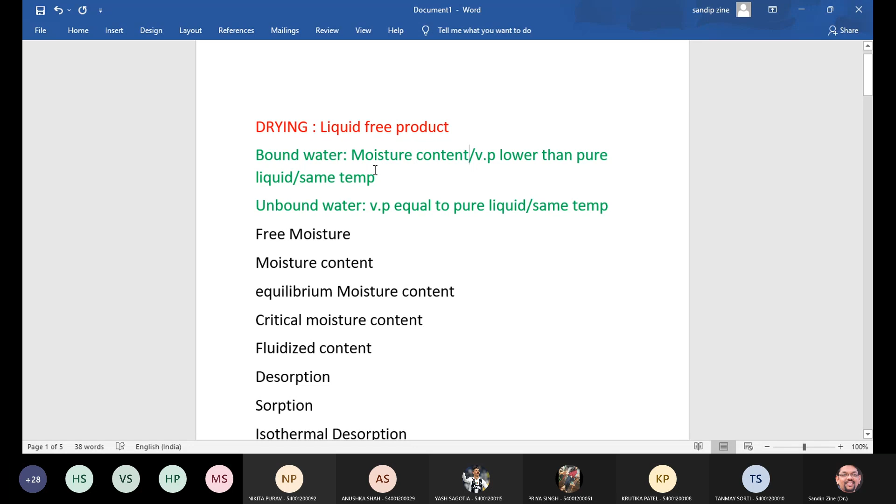Clear now, the definitions of bound water and unbound water? Any doubt over here? Because these terminologies we are using to understand the various equipments that we are using for drying purpose.

Whereas free moisture, what is the meaning of free moisture? It is the moisture content of the solid in excess of the equilibrium moisture content. That is called free moisture. Clear this particular thing? Free moisture is the moisture content of the solid in excess of the equilibrium moisture content. That is called free moisture.

Then obviously the question will pop up in your mind, then what is moisture content? So moisture content is measured by the ratio of weight of dry sample to the ratio of weight of water in a sample. So this is nothing but a ratio, isn't it?

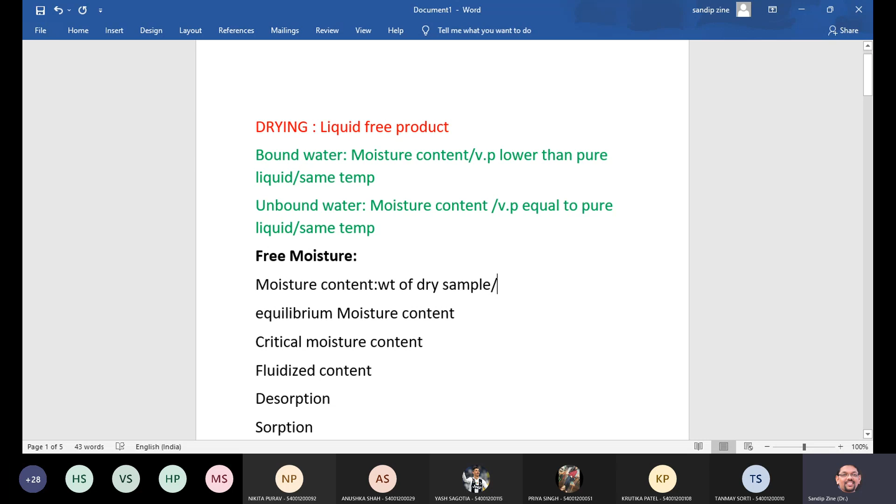I'm just mentioning over here the definition of moisture content, that is the ratio of weight of dry sample to the ratio of weight of water in a sample. So that is called moisture content. Clear this definition as well.

Any doubt over here, you can raise your hand, or maybe you can share your thoughts on various terminologies whatever we are going to use. One important definition is there, students, equilibrium moisture content. What is an EMC?

Equilibrium moisture content, it is the moisture content of the solid when in equilibrium with the given partial pressure of a vapor in the gas phase, and that is called equilibrium moisture content. Clear this, because this definition is also important over here.

So what we are mentioning over here, it is the moisture content of what? Solid only. And what is the difference? When in equilibrium with the given partial vapor pressure in the gas phase. I'm just writing keywords over here.

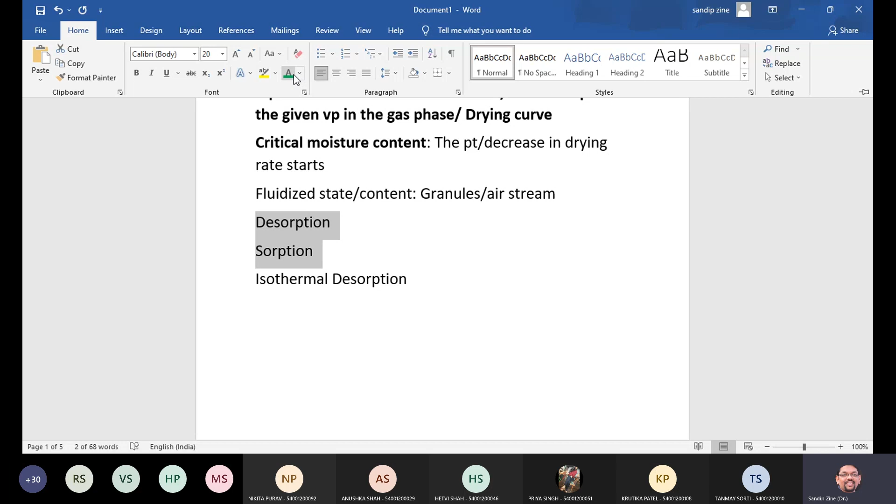Would anyone like to add what is the meaning of desorption and sorption? Any student would like to share their thoughts on these two terminologies? Akshat, Anish, or Devanshi, you can drop your points here. Jenny, can you mention something about desorption and sorption?

Sir, sorption is basically absorption or adsorption. Okay, agree. Any other sharing?

And sir, desorption would be the opposite, right? Release of the substance that was sorbed. Correct, correct, correct. Whatever Anish reflected on these two terminologies, we will pick up the same point by considering your understanding related to equilibrium moisture content.

This terminology, equilibrium moisture content, is the moisture content in a solid when in equilibrium with the given vapor pressure in the gas phase, useful to understand the drying curve pattern. By considering this understanding, we will try to understand desorption. Desorption occurs if the solid contains more moisture than EMC.

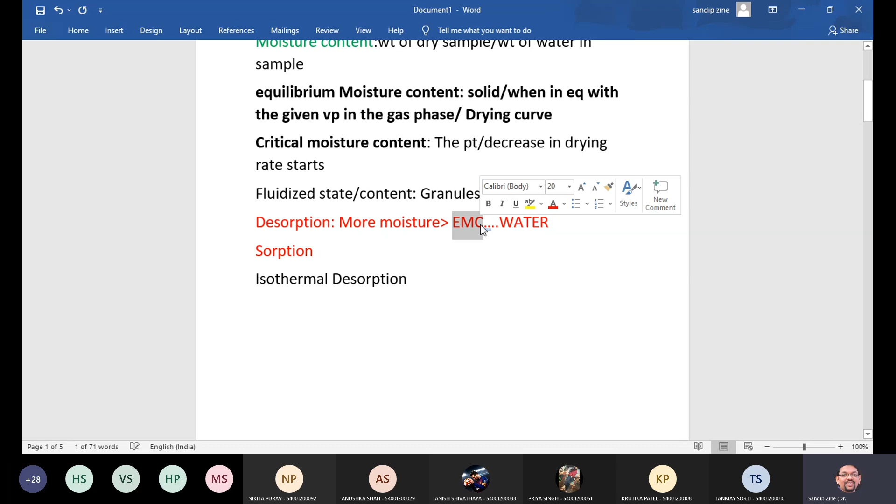More moisture content than EMC - I will use the greater than symbol. More moisture than the equilibrium moisture content, then the solid will continuously lose water. What will happen then? Obviously water composition is higher, so in desorption, water will be released continuously until the equilibrium moisture content point is achieved. Till that time water gets released, and that is called desorption.

Is this terminology clear? Sir, sorry to interrupt, but I'm facing some network issue.

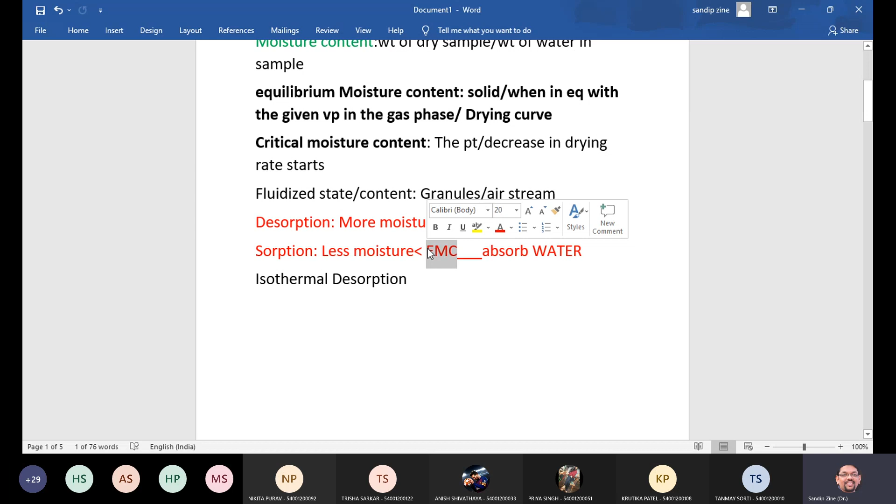Clear this thing, students, desorption and sorption. I am giving you more stress over here. I am taking these terminologies very slowly because we use the same kind of terminologies number of times when talking about principal construction and working of various equipments in this drying chapter.

One more last terminology we will pick up, that is isothermal desorption. Now isothermal, only one word we have added just before desorption. It is the process of reducing the residual moisture content to optimum values when drying is continued at warm temperature. So drying is at warm temperature.

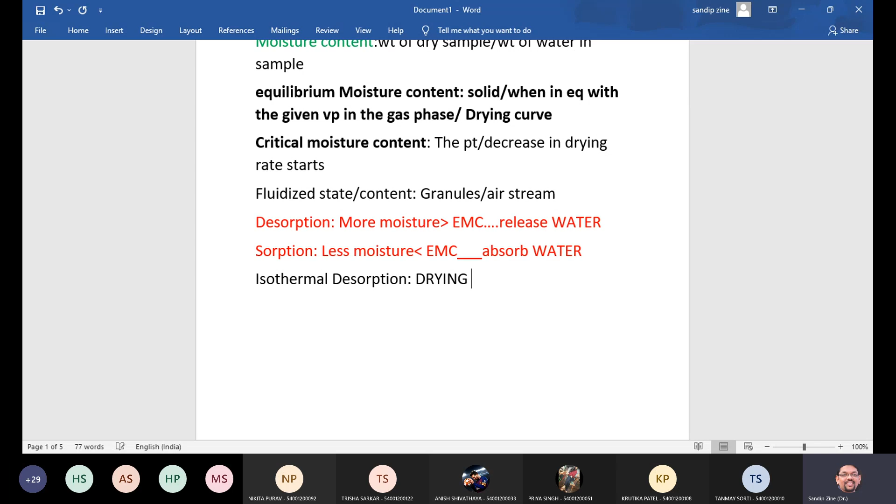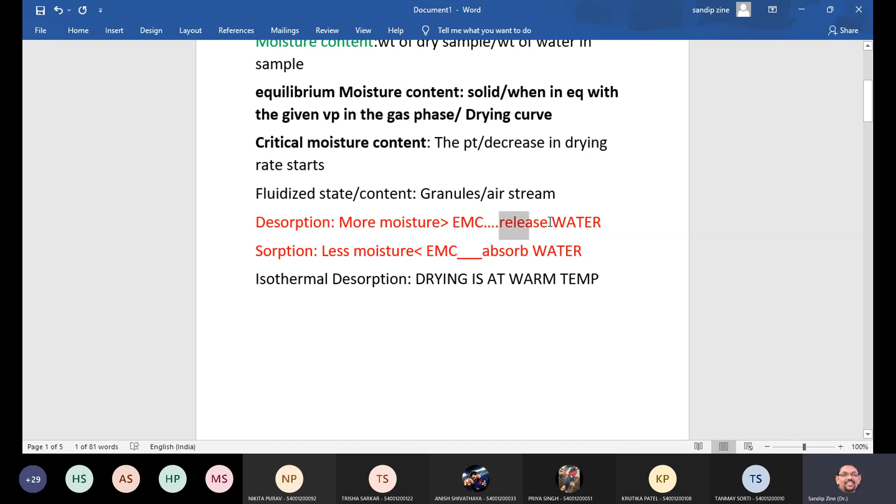Same thing, more moisture content than the equilibrium moisture content. At that time it releases the water continuously to get to this particular point. But when we are talking about the isothermal word over here, drying is at warm temperature, so we are using the terminology warm temperature.

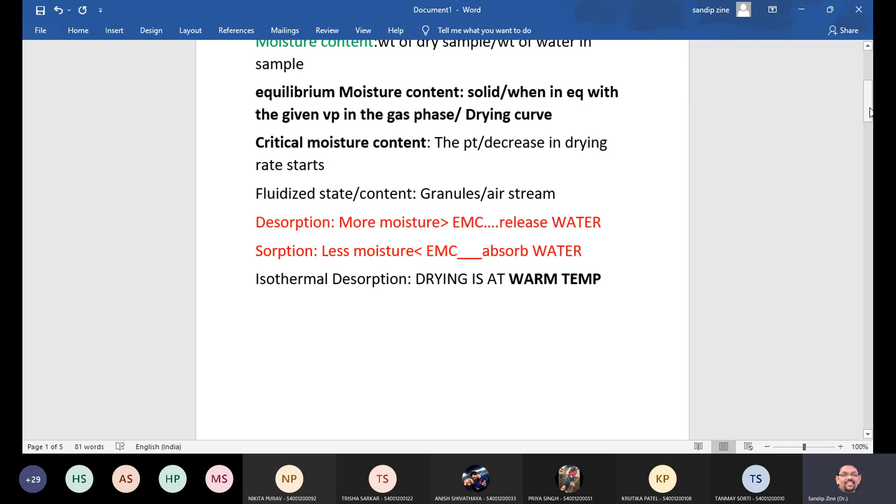So clear this particular point, whatever the terminologies: drying, bound water, unbound water, free moisture, moisture content, equilibrium moisture content, critical moisture content, fluidized state, desorption, sorption, and isothermal desorption.

So moving further, by considering some basic points, in the previous class we discussed the differentiation between drying and evaporation. You pointed out some points related to the difference. Obviously, water is removed at a temperature below the boiling point of water in drying, and in evaporation, water vapor is removed at its boiling point.

Also, a small amount of water is removed from the solid in drying, whereas evaporation includes removal of a large amount of water. And a dry solid product is obtained in drying, while in evaporation the final product is either a concentrated solution, suspension, or slurry. It is not expected that you get a complete solid product in evaporation.

And obviously in drying, carrier gases such as air are used to remove the water, and in evaporation no specific gas is used. So in this way we have just recapitulated the difference between drying and evaporation.

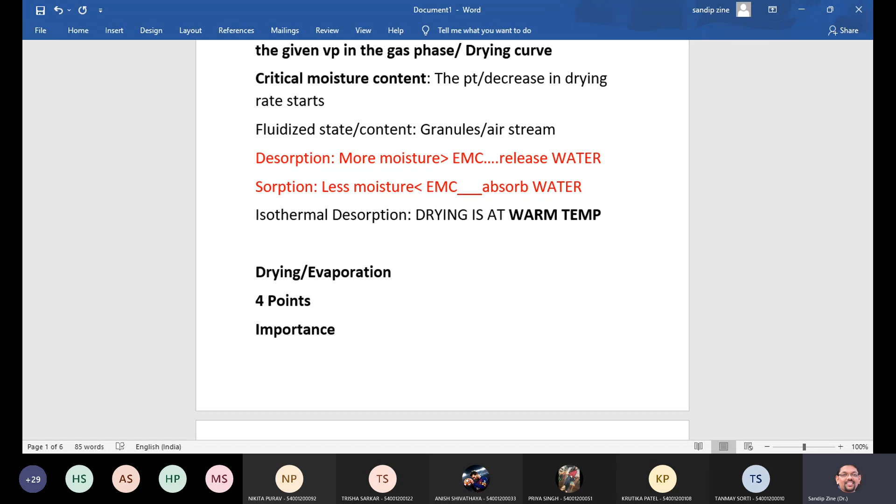That point also we had seen in the previous session, along with some application or importance of drying in the pharma industry. So till this particular point we had covered in the previous session, and mostly all of it we have just revised now. I think we have also covered some application or mechanism of the drying process as well, if I'm not wrong.

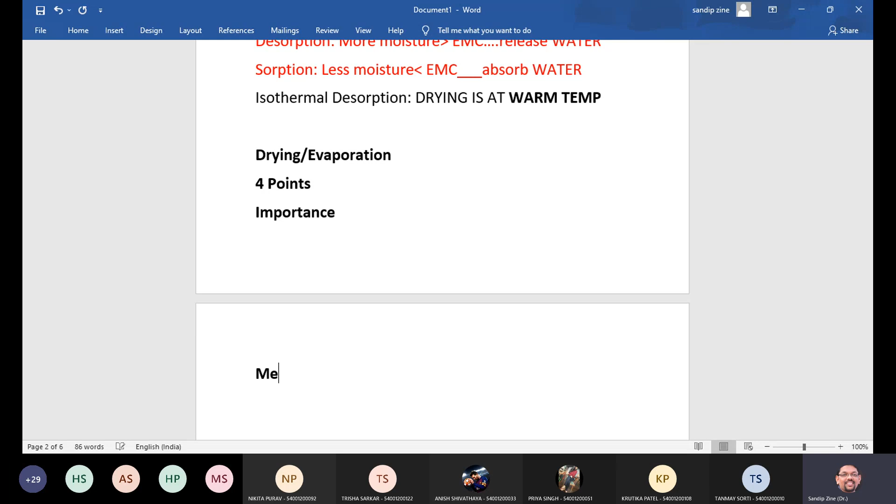So can anyone share about the mechanism of drying process, what happens exactly? Mechanism of drying process, which are the two steps involved in the mechanism of drying? Anyone?

Microwave, convection, conduction, radiation - yes, that is somewhat what we can say. In case of heat transfer, those are the ways, maybe conduction, convection, radiation. I'm just asking about the first part of that general drying process.

If you have to dry something, what will be the exact mechanism, in what way will that particular thing get dry?

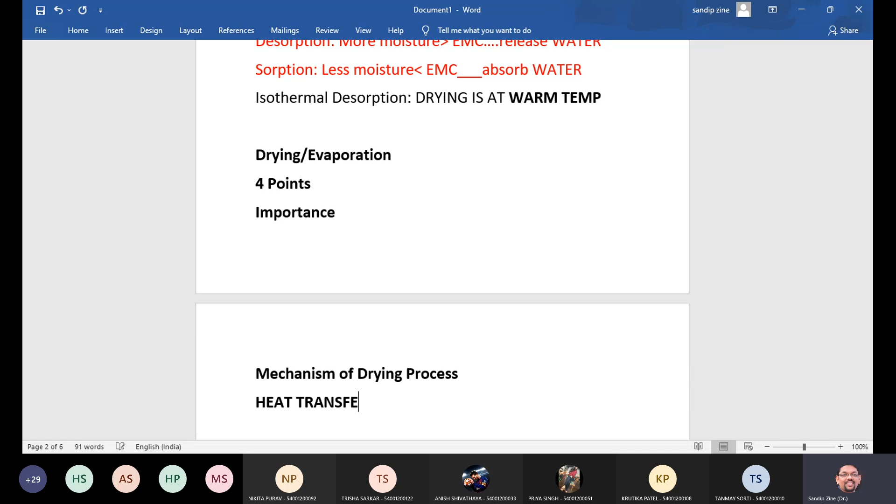Whatever two terminologies we are using over here, the first thing is about heat transfer and another thing is about mass transfer. So students, whenever studying pharmaceutical engineering, try to capture key points under each topic. If mechanism is asked, immediately two things should pop up in your mind: heat transfer and mass transfer. If you know these terminologies, then you can write n number of things - what is heat transfer, what is mass transfer.

And at the time you complete this process, you can complete the full answer of a question like: give detailed mechanism of drying process. This will be the simple question. So obviously two things should pop up in your mind - one is heat transfer and another is mass transfer. Now you can explain that.

Drying not only means the elimination of moisture, but during the process it is essential to preserve the physical structure and appearance as it is. And it is a complicated process. So obviously, drying involves two processes.

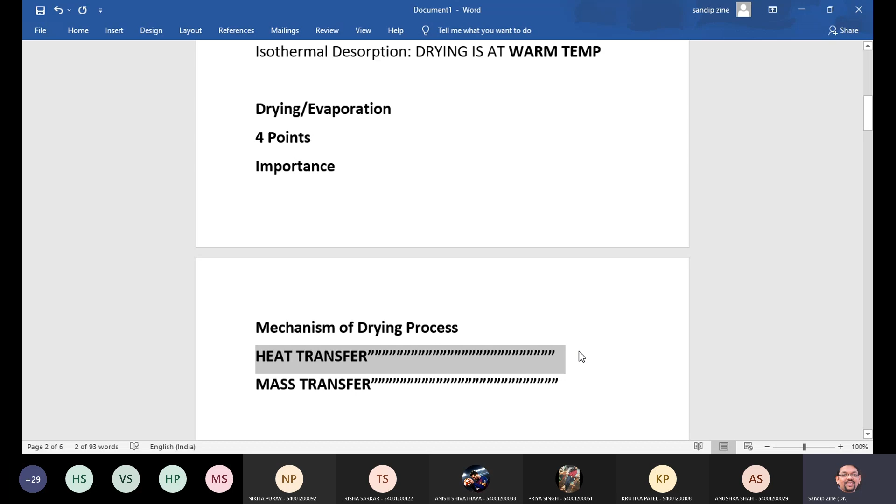The first one we have written is about heat transfer. So what exactly is heat transfer? Where heat is generated within the solid and flows to the exterior surface. So suppose I am writing over here, the heat gets generated and flows towards the exterior surface. That is about heat transfer.

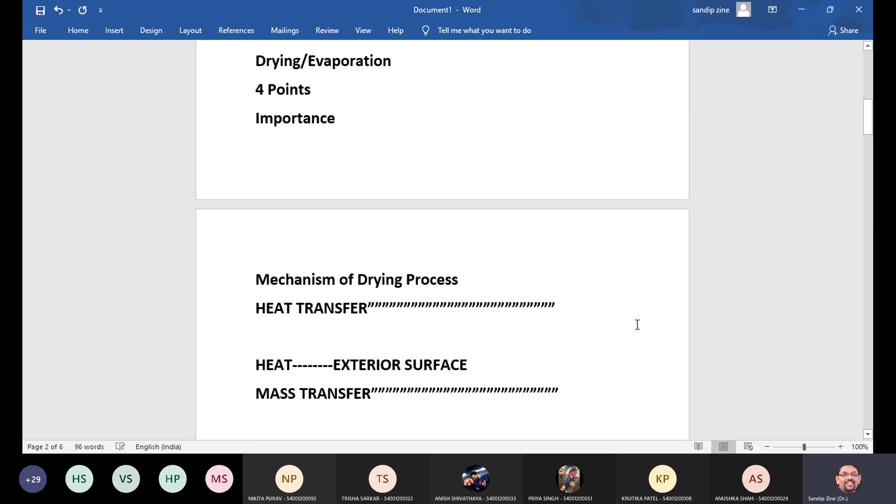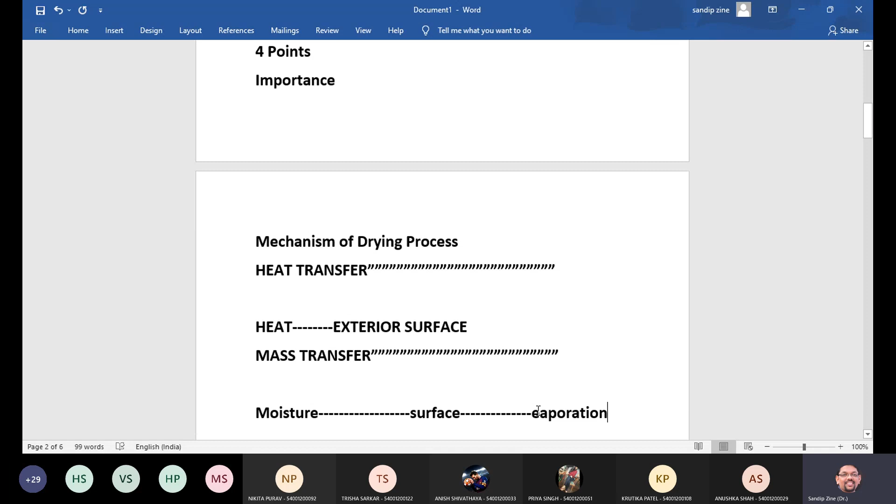In case of mass transfer, suppose I am asking you - mass transfer involves the movement of moisture to the surface of the solid and its subsequent evaporation from the surface. So moisture that gets towards the surface and subsequent evaporation - that is called mass transfer. This is as simple as it is about the mechanism of drying process.

And then you can quote an example as well. Water, for example, water in a wet solid mass is either present in a bound form or maybe the unbound form. Are you agree with these things? Because suppose I am mentioning water we are using, so either this water will be in a bound or unbound form.

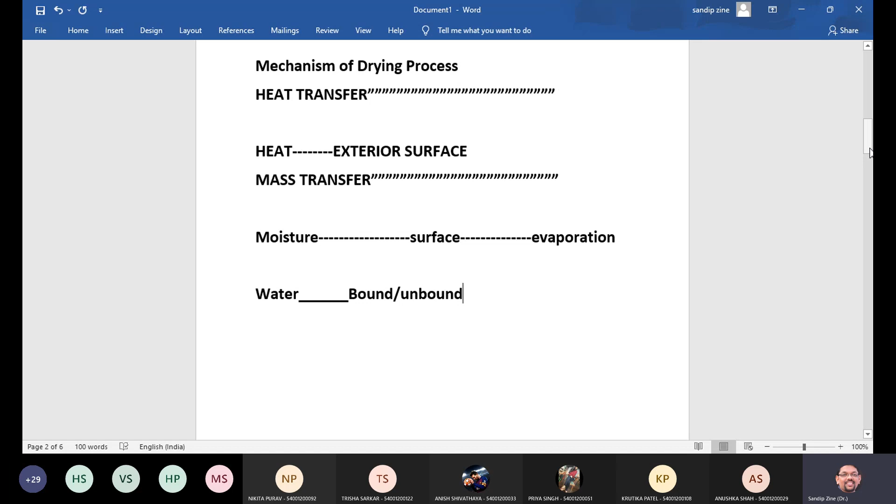And now you know the terminologies - what is the meaning of bound water and unbound water? Unbound liquid content, because we have seen over here what is bound water and what is unbound water - where moisture content has vapor pressure lower than the pure liquid, and here the vapor pressure is equal to the pure liquid. So these terminologies you know.

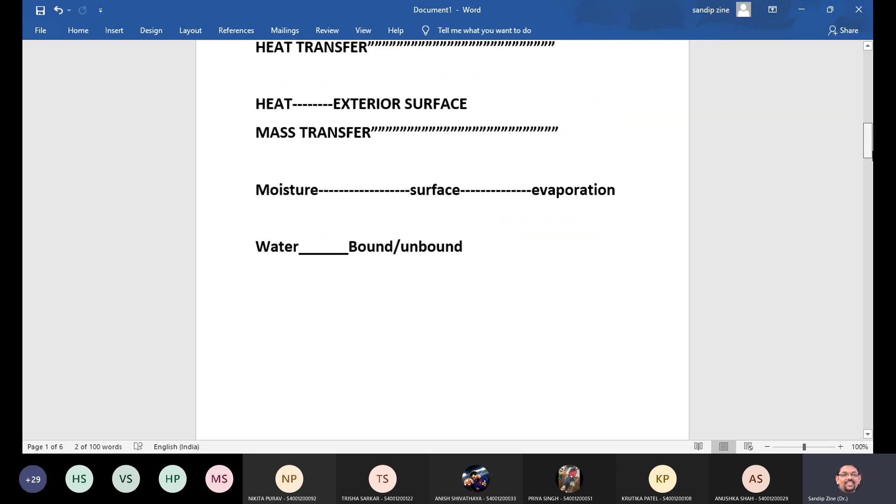So obviously you can correlate over here in case of mechanism of drying process - water in a wet solid mass is either present in a bound form or unbound form. Moisture content of a substance that exerts equilibrium vapor pressure lower than that of the pure liquid at the same temperature is called bound water, and substances containing bound water are called - what is the terminology? Do you remember students? That is hygroscopic.

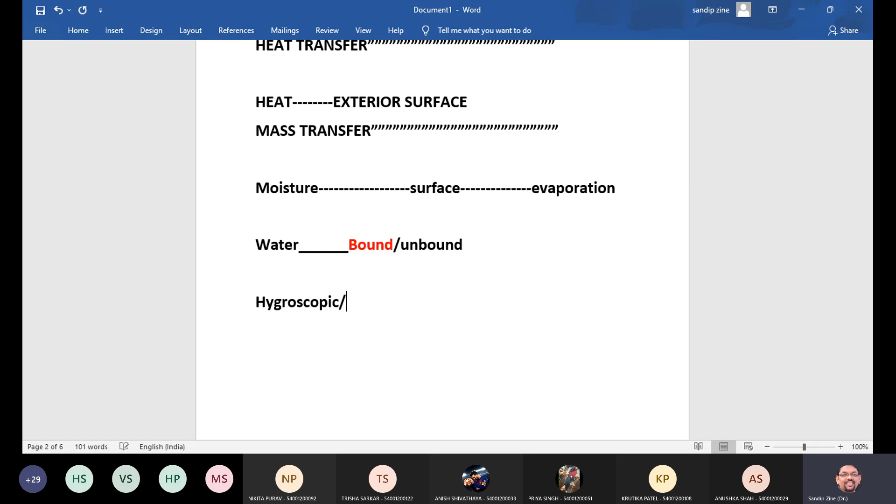Whereas moisture content of a substance that exerts equilibrium vapor pressure equal to that of the pure liquid at the same temperature is called unbound water. Thus in a non-hygroscopic material all the liquid is in unbound form. We are talking about these two terminologies again - hygroscopic and non-hygroscopic. Hygroscopic is the bound part, so let me mark it red for clarity, and unbound form is non-hygroscopic.

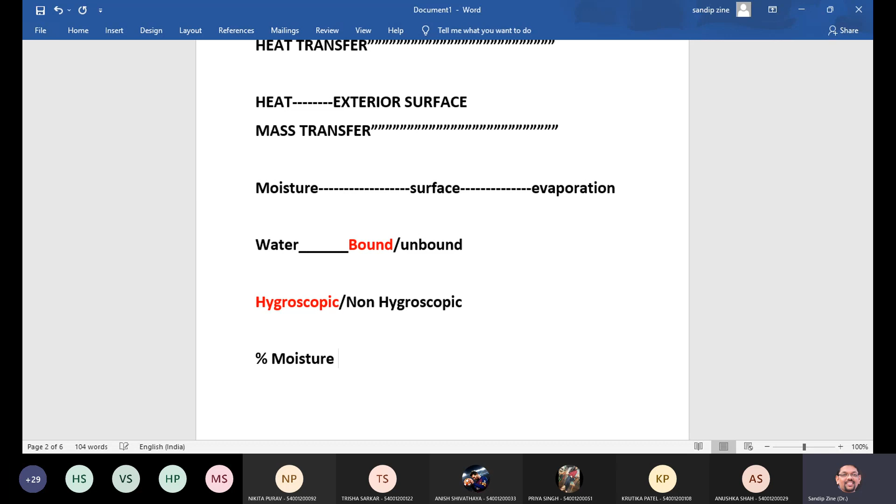Clear on this particular thing? So the moisture content is measured by a ratio of weight of water in a sample to the weight of dry sample - that is called percentage moisture content. Suppose based on this, what is the formula for this percentage moisture content?

Anyone can talk about this percentage moisture content as well. That is weight of water in a sample. We can always write: weight of water in sample, divide by weight of dry sample, into 100, as it is a percentage. So this is a simple formula of percentage moisture content: weight of water in a sample divided by weight of dry sample, into 100.

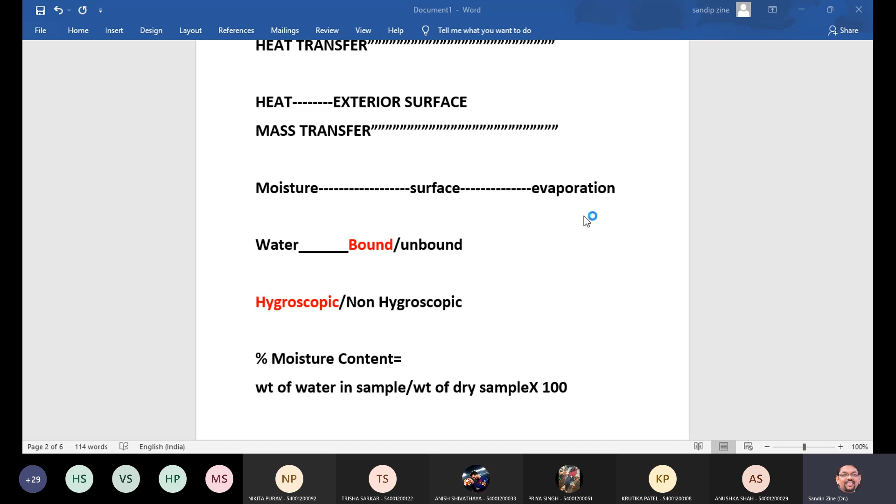Clear this particular point? Any doubt up to this? So can we move ahead to understand the drying curve, or maybe to understand the equilibrium relationship as a new sub point? Equilibrium relationship. Why are we talking about this now? The question will not be directly on equilibrium relationship, but we are talking about it so that your understanding will be better on this drying curve.

What is a drying curve? Because questions are generally asked on this point about drying curve, and to get acquaintance with this drying curve, we are talking about equilibrium relationship first, and then we will touch the actual part of our syllabus, that is the drying curve.

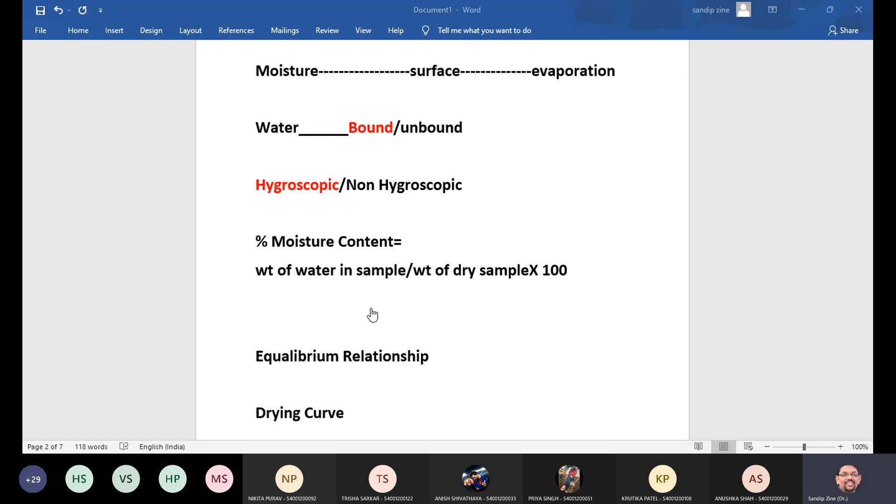So if you allow me, I can go ahead on this new sub point as well. If your concepts related to basic terminologies are clear, and the mechanism of drying process is clear, then we will talk about this equilibrium relationship. So dear students, what is equilibrium relationship? The moisture content of the solid when in equilibrium with the given partial pressure of the vapor in the gas phase is called the equilibrium moisture content, that we have seen over here. This is equilibrium moisture content, isn't it? Because we are talking about this point now.

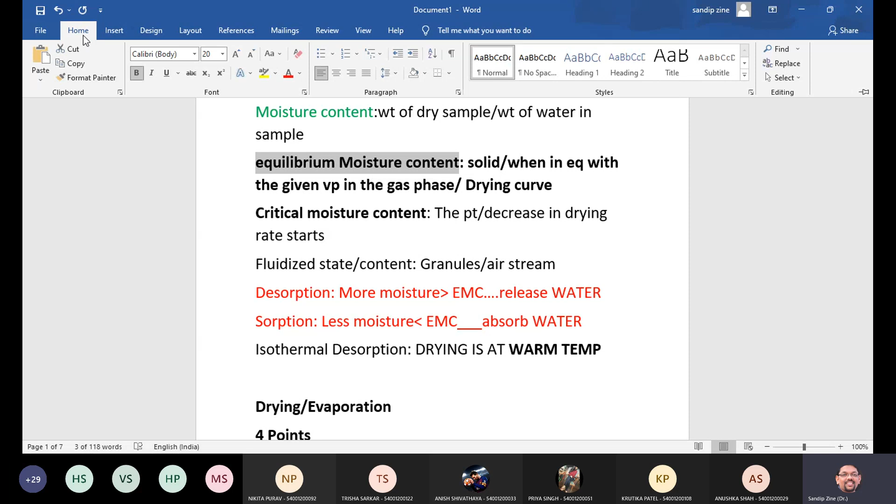And if the solid contains more moisture than the EMC, then obviously the solid will continuously lose water until EMC is reached, and this process is called desorption, as we have seen. And if the solid contains less moisture than the EMC, then the solid will continuously absorb water until the EMC is reached, and this process is called sorption.

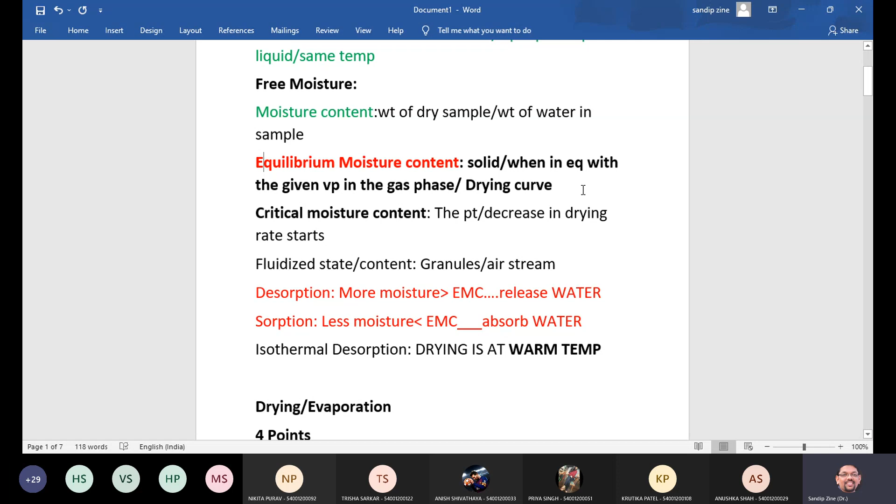So EMC, equilibrium moisture content of solid, is a constant for a given temperature and humidity of air. So for air of zero humidity, EMC of all material is 0. And with increase in air temperature, the EMC of solid gets decreased. So I am just mentioning key points again: EMC of solid is a constant, isn't it? Suppose I am mentioning this point over here only: EMC of solid material is constant.

Are you getting this point? The EMC of solid is a constant for a given temperature, isn't it? Suppose I am just writing small t as a point of temperature, and humidity of air, whatever the relative humidity we are talking about. This is the temperature and this is the humidity. So we are talking about the equilibrium relationship. Equilibrium moisture content of a solid is a constant for a given temperature and humidity of air. So for air of zero humidity, EMC of all material is 0. Equilibrium moisture content will be 0. And with increase in air temperature, the equilibrium moisture content of the solid decreases.

So in case of a non-porous insoluble solid, just take an example of powder, whatever Pond's powder we are using, or any powder. You can see the texture of the powder, that is a non-porous one, that is an insoluble powder. So for that particular powder, the equilibrium moisture content is 0. Are you getting this point? EMC of this talc powder is 0. For example, I am just mentioning talc here. So equilibrium moisture content of this talc is 0.

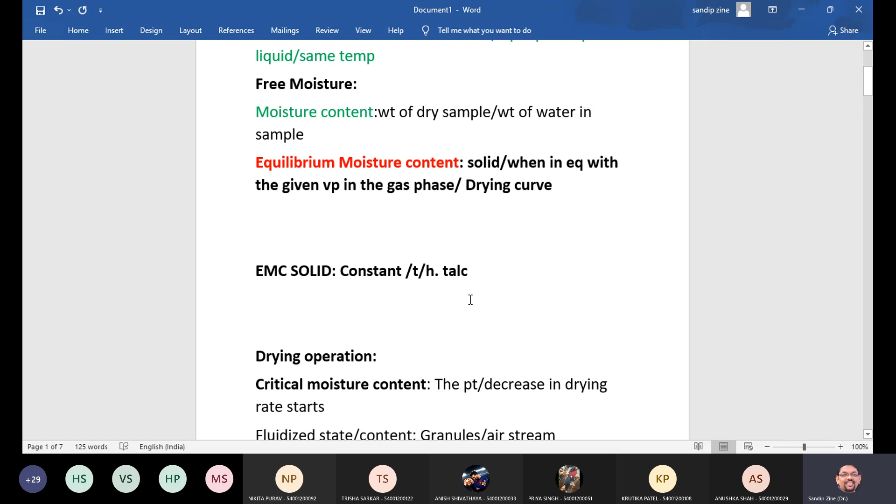Then after equilibrium relationships, we can now add one more point over here as rate relationships, isn't it? So let me scroll down, we have one more point: rate relationship. So these two things we are using to understand the drying curve. So students, in rate relationships, you know what happens? Drying of solids follows two drying zones known as the constant rate period and the falling rate period. I am just mentioning here: one is constant rate period, and the other is falling rate period.

During the constant rate drying period, the moisture vaporized per unit time per unit area of drying surface remains constant - that's why it's called the constant rate period. In the falling rate drying period, the amount of moisture vaporized per unit time per unit area of drying surface decreases continuously - that's why it's called the falling rate period.

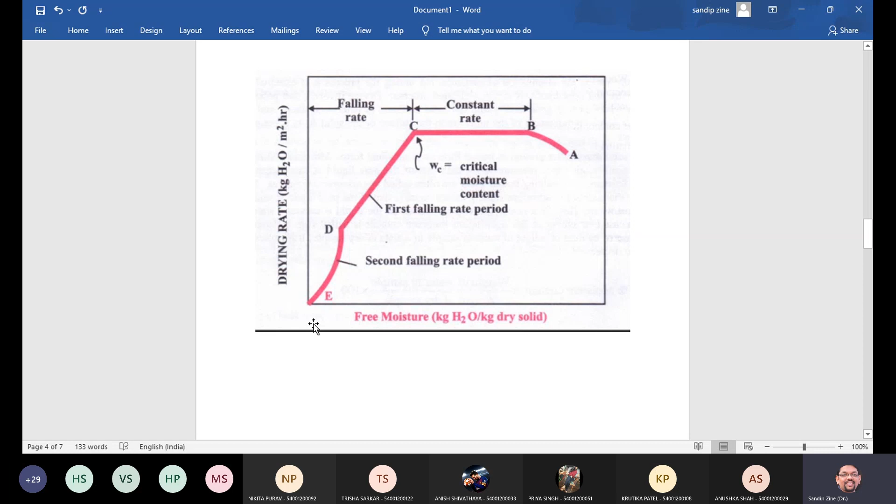So here is a typical drying rate curve, the drying curve. Here drying rate is plotted, for example in kilogram water per meter square per hour, against free moisture. We start from points A, B, C, D and E. This period represents the constant rate period in the rate relationship.

Another point is about the falling rate, starting from point C. It starts the falling rate up to point E. So this point, where constant rate transitions to falling rate, is called the critical moisture content. This is the first falling rate period and this is the second falling rate period.

This is useful to understand the mechanism of the drying process, or to write a short note on the drying curve by explaining various terminologies - what is the meaning of constant rate, falling rate, first falling rate period, and second falling rate period. All these terminologies you should know.

So what is happening at point B? What does point B represent? It represents equilibrium temperature conditions of the product surface. The curve consists of section BC, which is point B to point C, known as the constant rate period.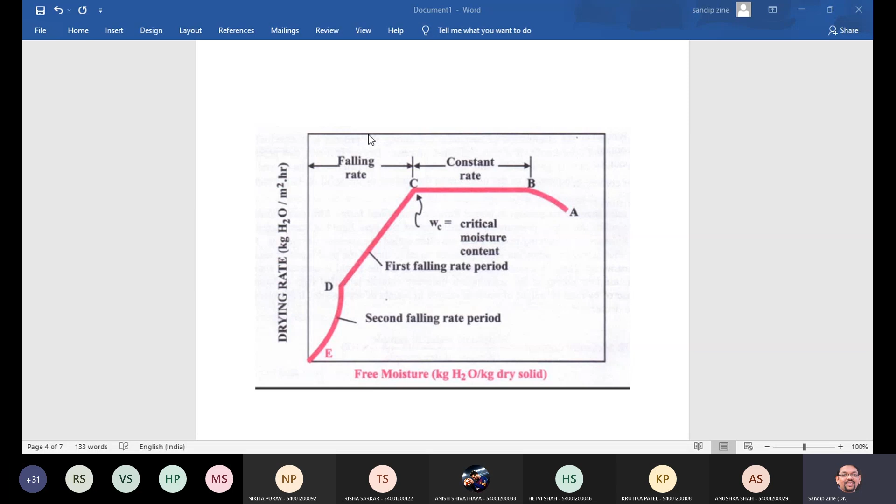Is this point clear? Any doubt here to understand all these parts or segments as of now?

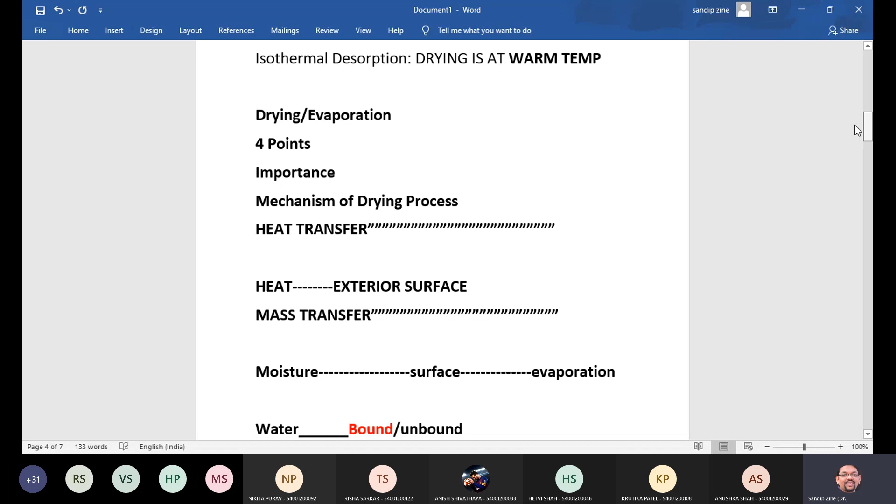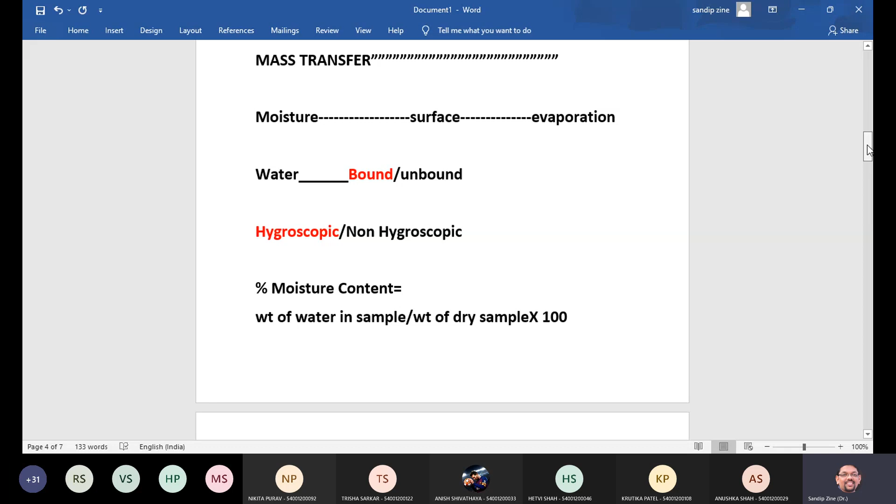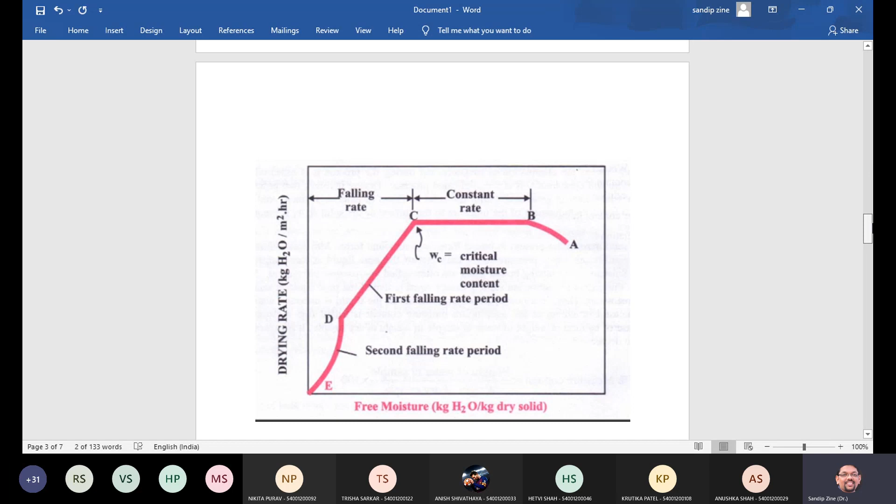We have seen the terminologies, the mechanism of the drying process, what is meant by bound water - hygroscopic and non-hygroscopic, how to calculate percentage moisture content, and what is the meaning of equilibrium relationship and rate relationship to understand the drying curve. The drying curve is the diagram depicted from the Subramanian book. Based on this you can easily write a note on drying rate or the drying curve.

So students, any doubt here as of now? No sir. Okay, all right.

Then we will talk about the next topic, the next heading of the same, which is about classification.

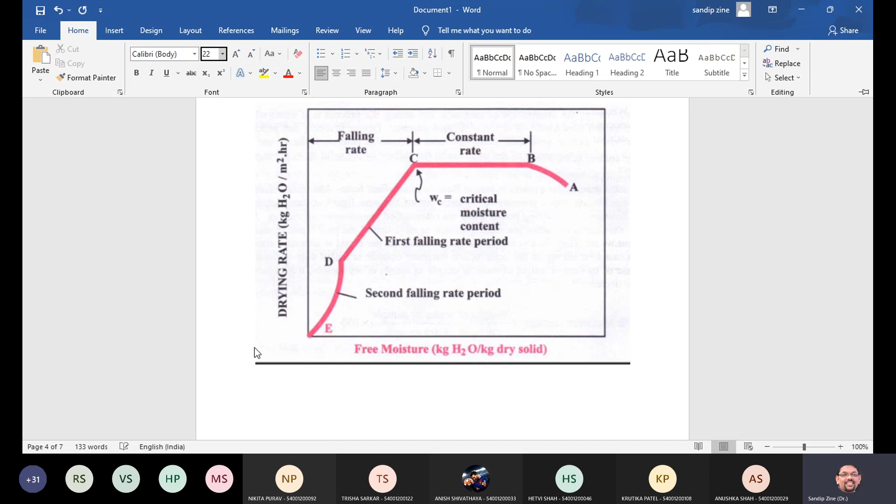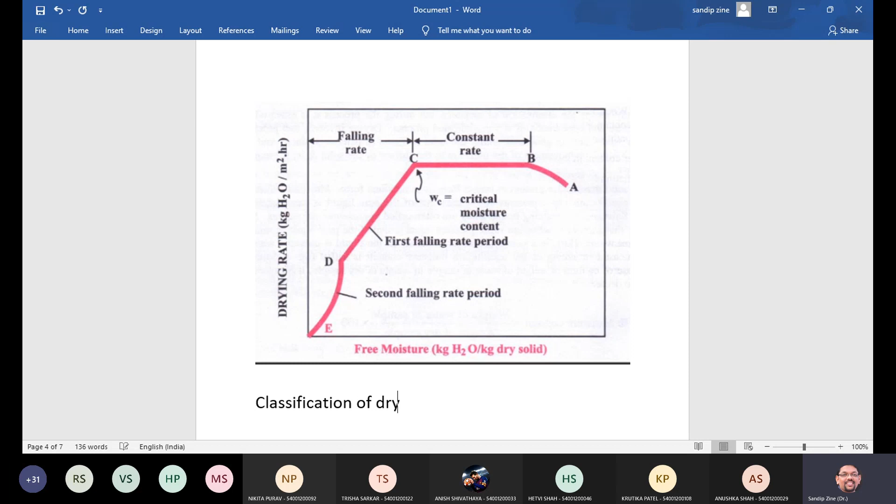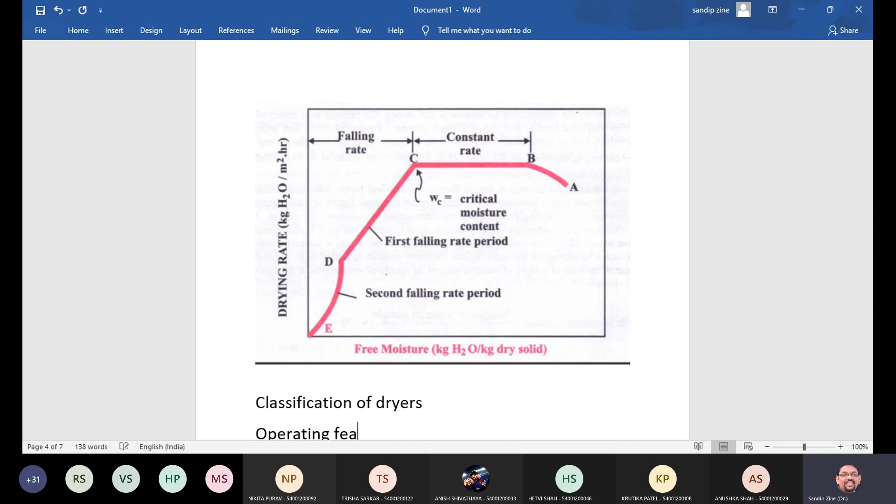Classification of equipments, or maybe the classification of dryers. In classification of dryers, what is expected? These drying equipments are generally classified on the basis of their operating features. Based on that, these drying equipments are classified.

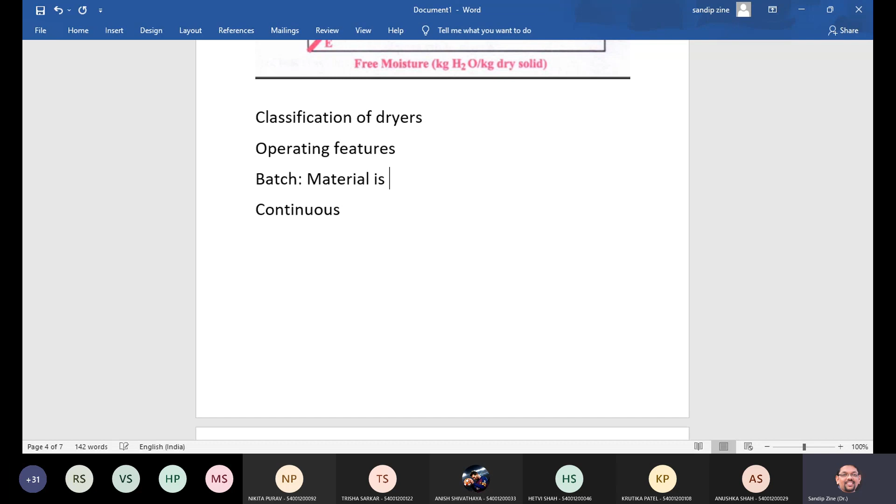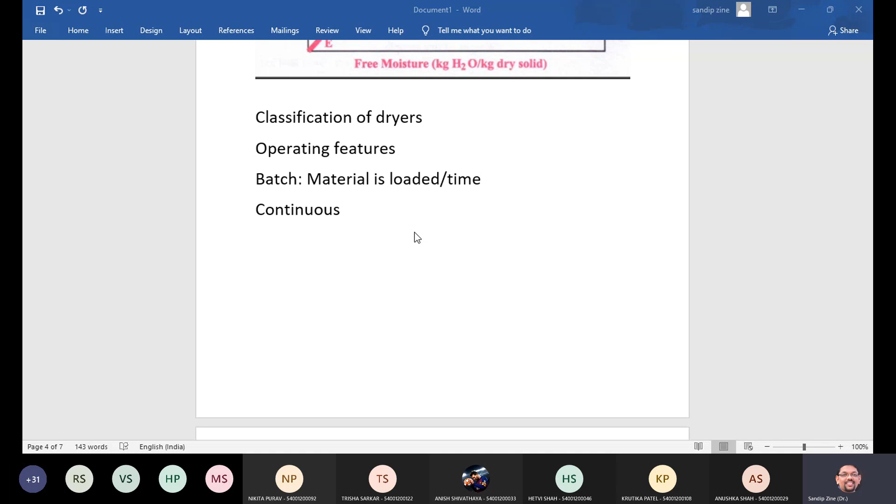It can be classified as batch or continuous. In case of batch dryer, the material is loaded in the drying equipment for a given period of time, and against time we check whether the material is completely dry or not. In case of continuous mode, the material is continuously added to the dryer.

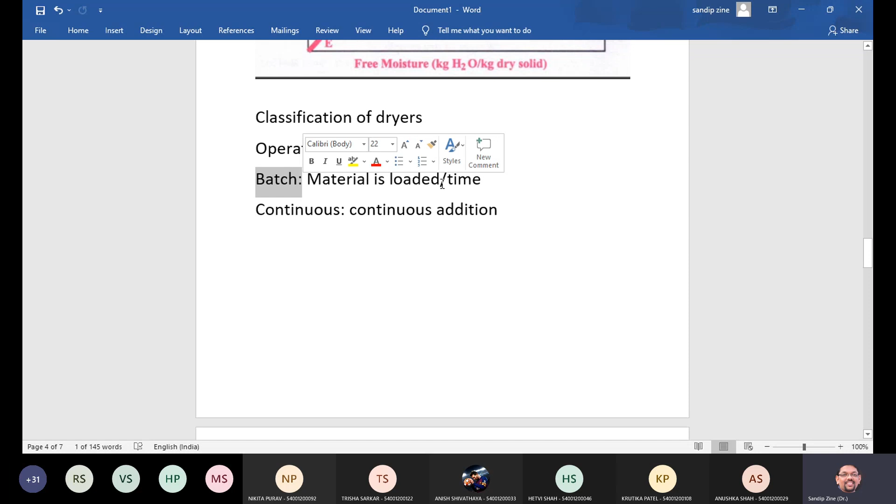All these dryers are classified based on their operating features. In batch dryers, once you load say 10 kg of material, you check after 1 or 2 hours whether drying has completed or not. In continuous dryers, you can continuously load the material into the equipment for drying. That is called continuous addition, and based on this, drying equipments are classified.

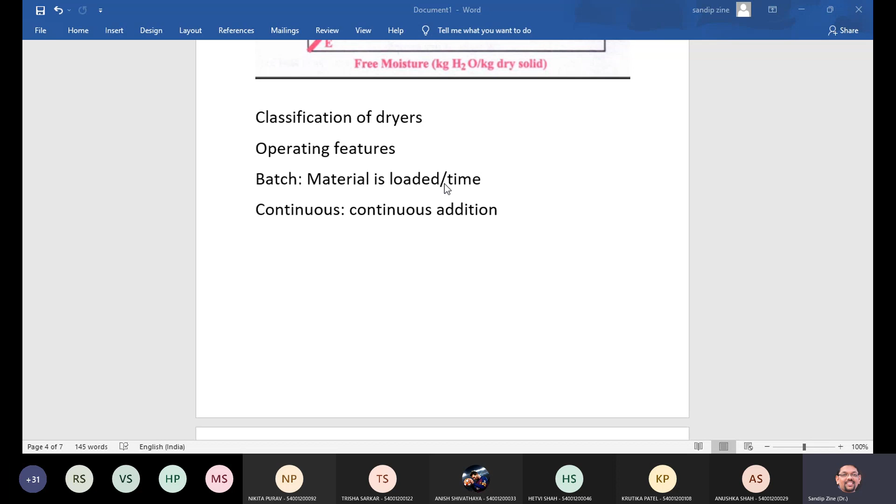Also, in a few cases, vacuum is used to decrease the drying temperature. Why is vacuum necessary? To decrease the drying temperature. So in some cases, not all, some dryers use vacuum to decrease the drying temperature.

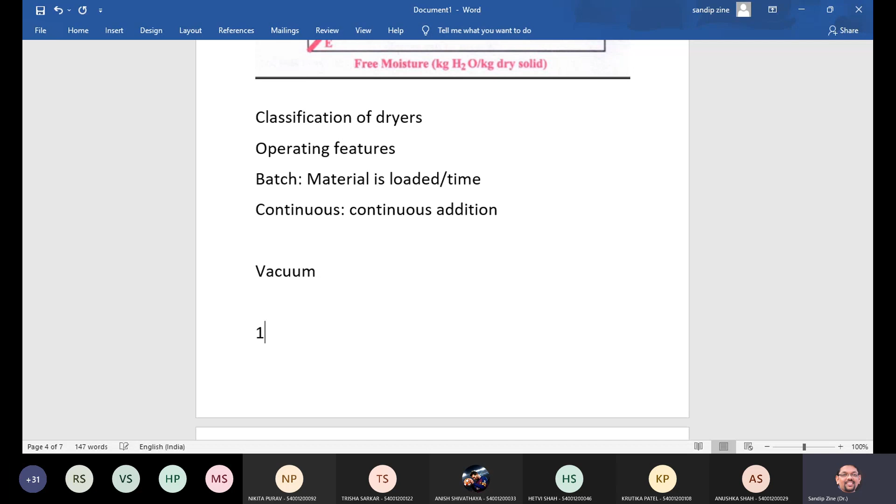We will see the classification and then stop for today. In classification of dryers, one type we use is the static bed dryer. This is one class, static bed dryer - not double S, single S. An example would be the tray dryer, or the freeze dryer.

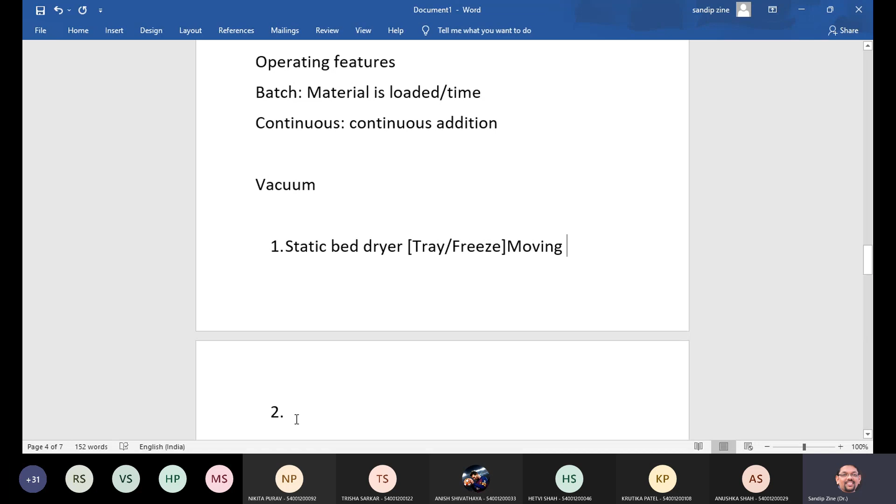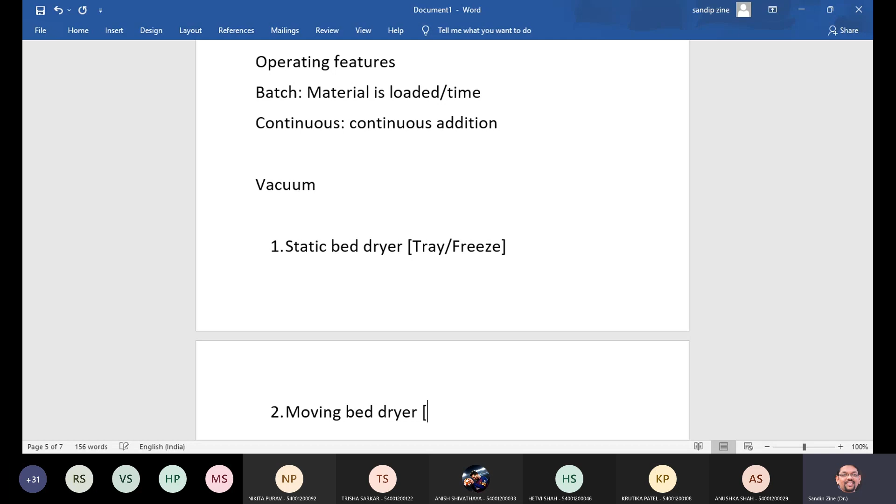Then one more class is moving bed dryer. What types come under moving bed dryer? A well-known example is the drum dryer. So this is a drum dryer. And the third class is fluidized bed dryer.

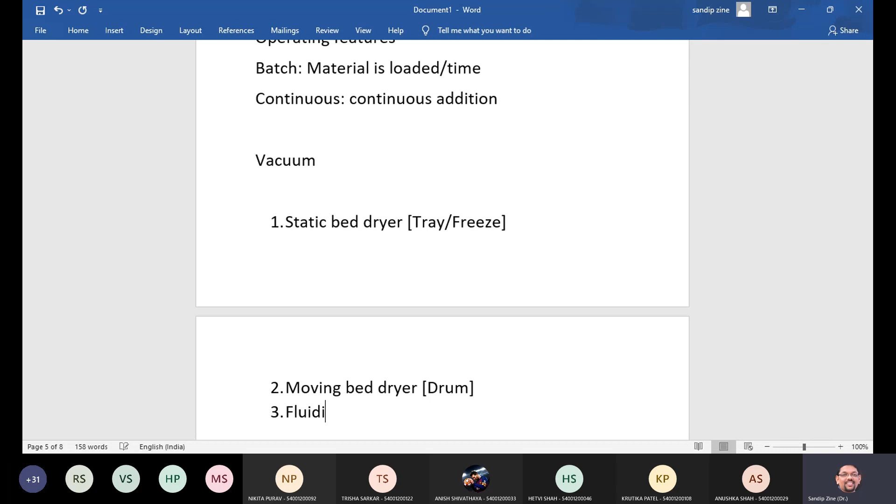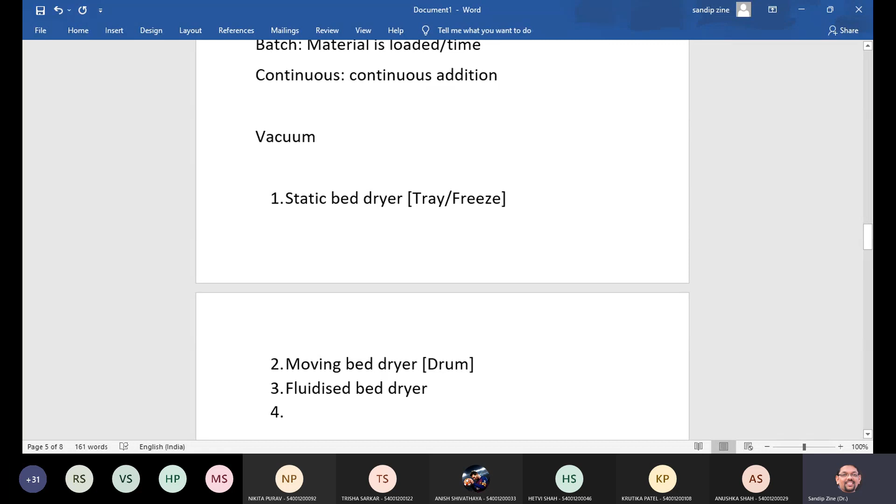Dear students, we will talk about these dryers separately - their principle, construction, working, advantages, disadvantages, and pharmaceutical applications. For the drum dryer, what is a synonym name? The synonym for drum dryer is roller dryer.